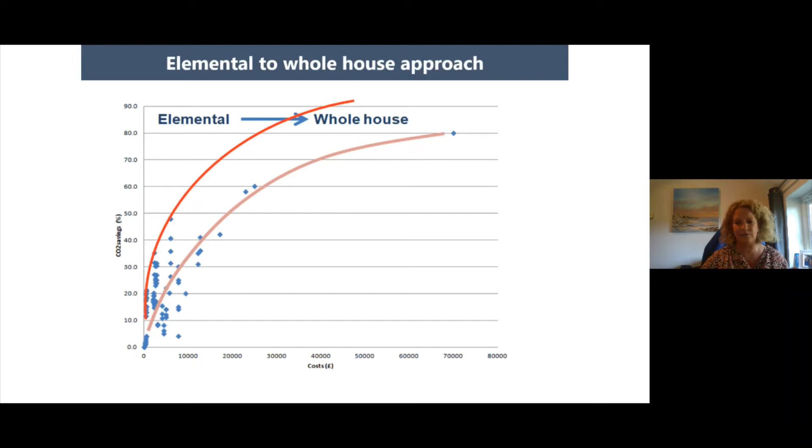So we did a bit of an analysis, and we realized that cost needed to come down significantly to enable people to take this whole house approach that would achieve the carbon savings that we need to get anywhere near net zero, but also to make it affordable, to enable the retrofits to actually take place. And it's not all about carbon savings, but about the huge raft of benefits that come with retrofitting social housing, including reducing fuel poverty, reducing energy bills, improvement in performance of the homes, and quality of the existing housing stock as a whole. Next slide, please.

So we've undertaken over 20 retrofits at the Welsh School of Architecture, working with social housing companies, and we have taken a whole systems approach with every single one of these retrofits. We incorporate demand reduction technology solutions, which includes external wall insulation, internal wall insulation, improved glazing, mechanical ventilation heat recovery or appropriate ventilation systems, LED lighting, and overall fabric improvements and heating improvements.

We've integrated renewable energy supply into the roof of all of the properties to enable the homes to generate their own energy, and in each of the properties we've also included some element of storage, and we're now using Teslas in most of the properties because of the flexibility in where they can be located, because obviously social housing is quite limited in the amount of space available.

The process that we've used is that we survey the houses in a fair amount of detail. We also monitor them for up to a year before any work takes place, so that we've got a really good understanding of how the buildings are performing before the retrofit works are implemented. We model the buildings to make informed decisions as to what the most appropriate and affordable solutions are for those homes. We've implemented the solutions, and then we continue to monitor the buildings to see how the solutions are performing in practice, to give people like yourselves evidence on what systems work best in the real world. Next slide, please.

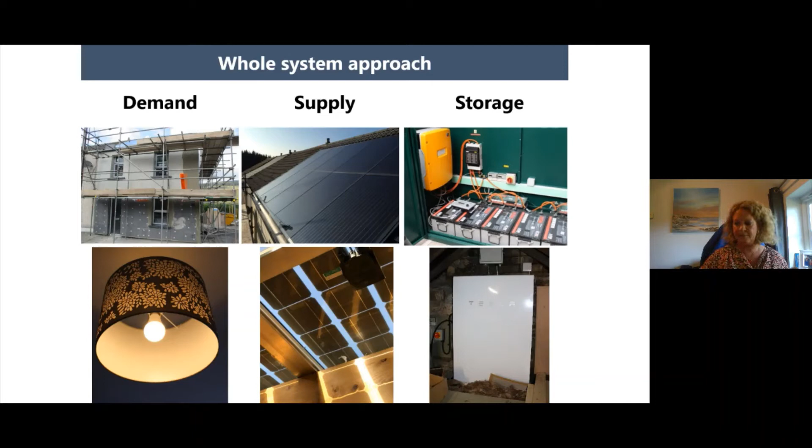So these are just some examples of the homes that we've worked on over the last 6 or 7 years. As you can see, they're very typical Welsh homes, because we wanted to demonstrate to social housing companies that it is possible to do it on very typical homes using very replicable solutions. We've chosen solutions that are appropriate for the home rather than for the occupant, so that they work as effectively as possible, and we try to make them as affordable as possible.

The aim was obviously to reduce carbon emissions, but also to bring down energy use and the cost of energy for the occupants, to have a positive impact on comfort and just generally improve the quality of the built environment as a whole. Next slide, please.

So just to give you an overview of a case study, which we completed early this year, we worked with Swansea Council on a run of 6 bungalows that were constructed during the 1970s. The bungalows were off gas. They were highly inefficient with regards to energy use. They had extremely high heating costs because they were either on oil or LPG.

The SAP ratings were very, very low, around 12 to 15. The levels of comfort were really poor, and the occupants were all elderly, so they were at home a lot during the day, so it was even more of a problem for them. And there was a lot of damp and mould throughout the properties. Next slide, please.

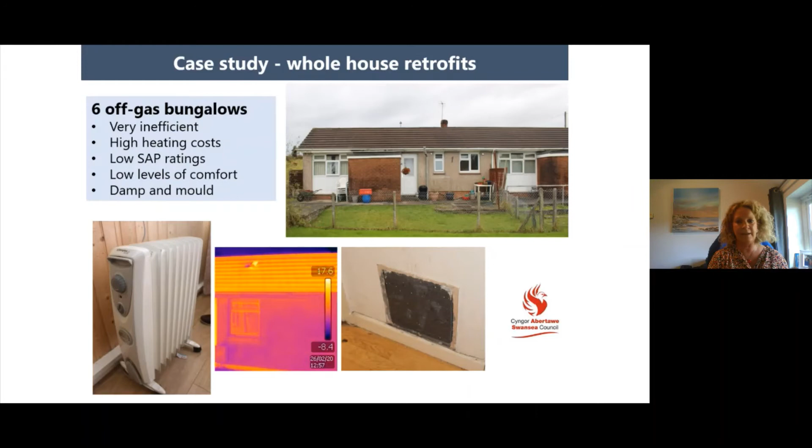So through our monitoring and modelling, we have worked with Swansea and the occupants to come up with a solution that is appropriate and replicable, so that Swansea Council can learn from the process that we've gone through.

So we have taken the whole house approach, which included reduced demand through loft insulation, replacing the windows, replacing PVC panels. If you focus on the fabric, sort of maybe smaller elements of the fabric, there can be 10 to 20% of reduction just by filling holes and replacing small elements of the fabric.

We've used ground source heat pumps across all 6 bungalows. We've incorporated mechanical ventilation and heat recovery to ensure that, due to the increased tightness of the properties, there's no compromise in the internal conditions of the buildings. And then we've integrated PV panels into the roof structure.

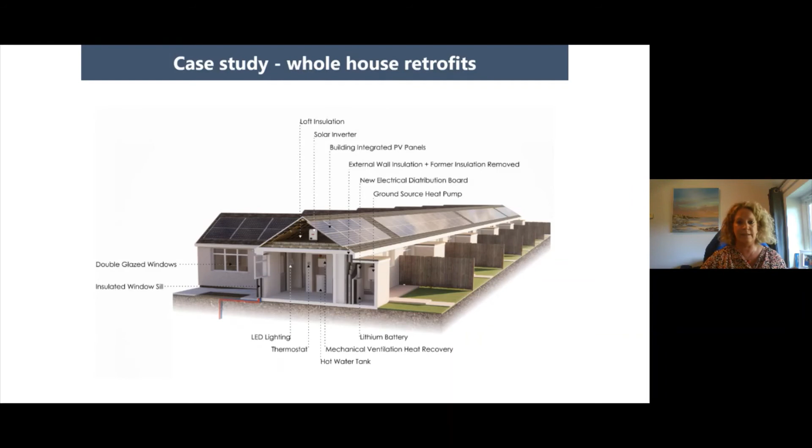So those are actually located on both the southeast and the southwest facing roof, which enables them to generate more electricity throughout a longer period of the day. And then any surplus electricity is stored in the lithium-ion batteries located in each of the bungalows as well. Next slide, please.

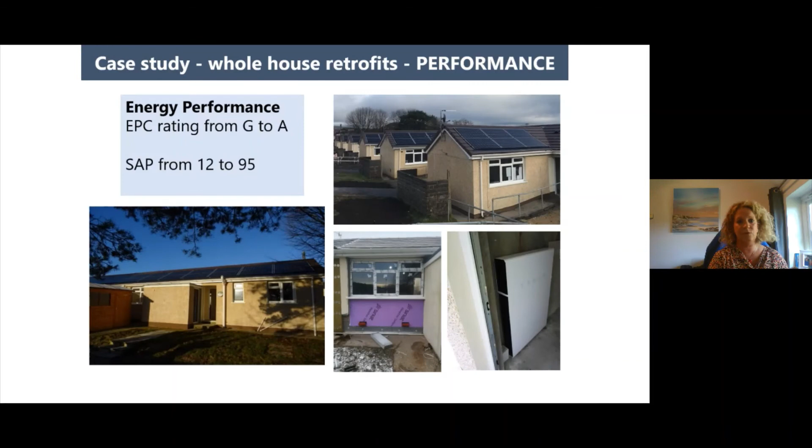So we have enabled the bungalows to improve their EPC rating from a G to an A. And their SAP ratings have improved from 12 to around the 95 mark. Next slide, please.

So the retrofit works were complete in February, and since then we've seen a significant reduction in energy use in general, which has been about 42%. The occupants are exporting to the grid, which is enabling them to generate an income.

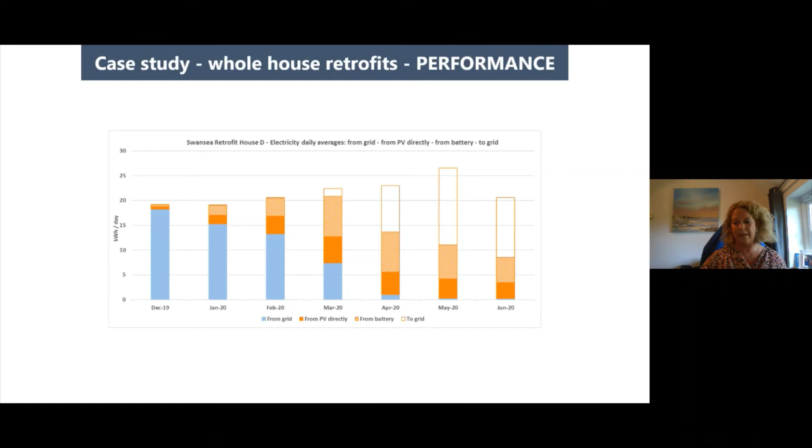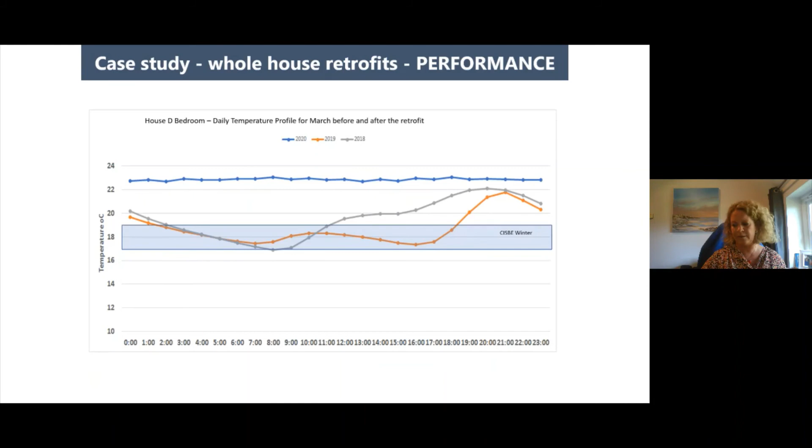Next slide, please. Thanks. So over the summer months, we've seen a reduction in the overall energy bills, which is all electric, from £51 a month to £3 a month, which is mainly their standing charge. The average has been 95% self-powered since March.

One of the things that Swansea and we've picked up on through all of the retrofits is that there are multiple costs, and you need to be very aware that it isn't just the technologies that cost money, but there are incremental costs. So sometimes roofs need repairing, distribution boards need replacing. Those sorts of things have to happen to enable a retrofit to take place.

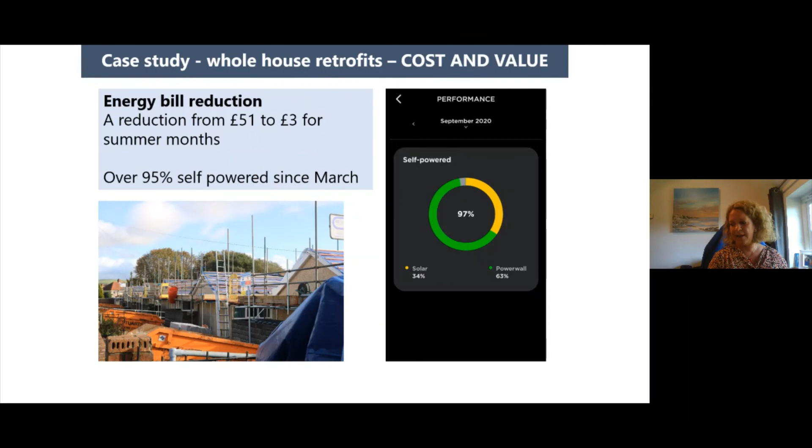And also during the process, the social housing companies tend to like to have luxuries as well, including things like replacing the gardens.

It's really important that a high level of collaboration and communication takes place across the whole process, from planning through to construction through to maintenance, and people need to engage to ensure that the retrofit gets delivered as it should and as it's been planned. Next slide, please.

And I think this has been touched on a few times today. We need to scale these up. It's not just about single houses or small groups of houses anymore. We need to be doing it at a community level.

The innovation isn't all about the technology. It's about the whole process and making people work together, to collaborate together, to procure the right things for the right places. And we need evidence to assist the decision-making process and to inspire progress going forwards. Next slide, please. That's it.